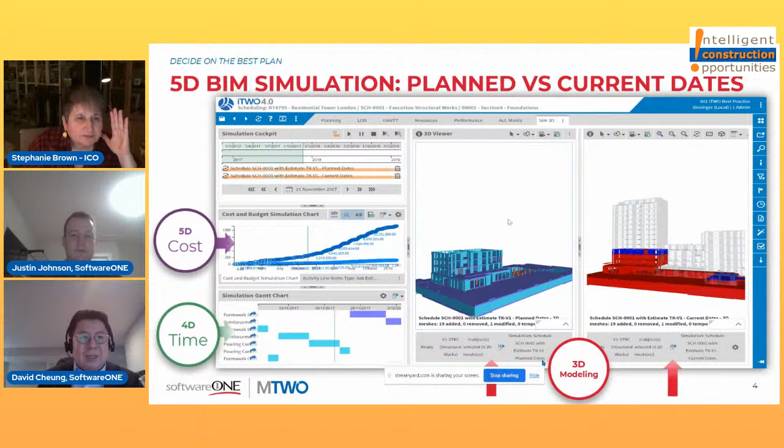Yep. I want to get into that, but I also want to make sure that we're talking about the carbon emissions. So if we could just sort of segue a little bit out of here for a minute. Yes.

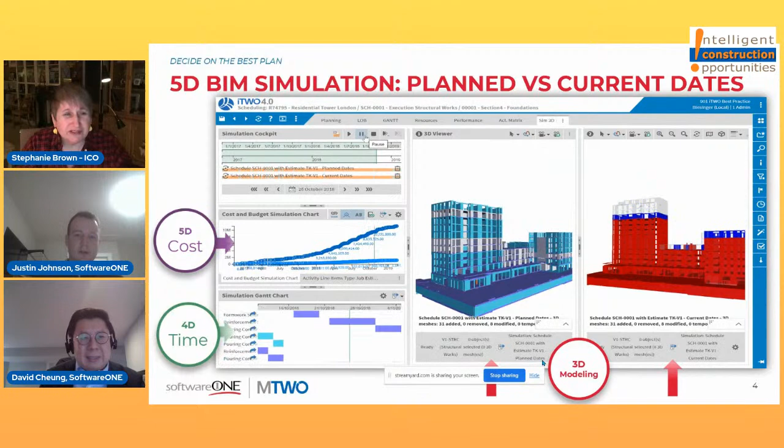Yep. No problem. Yeah. And sort of go into,

why are carbon emissions the problem? We kind of want to understand how much carbon does the construction industry emit right now, and why is this all of a sudden? Well, it's not all of a sudden. Certainly it's been coming along, but in North America we've been slower to adapt to it. Certainly, Europeans have been ahead of this. But we want to get into how carbon affects us based on how the construction industry is somewhat responsible for those emissions.

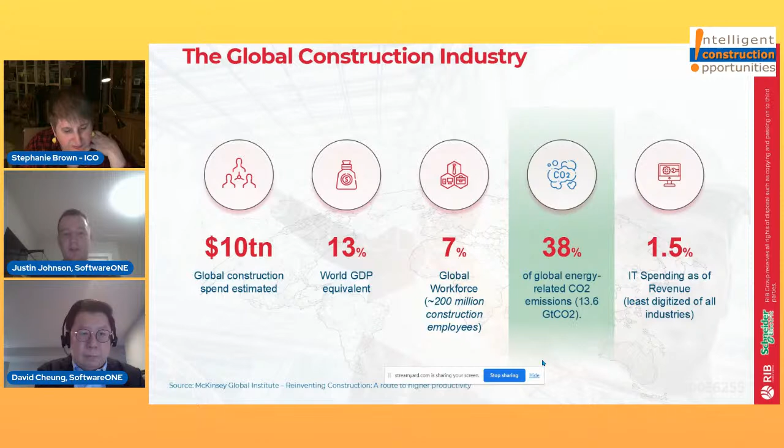Yeah, so I think this slide does a good job of summarizing some of those key figures, Stephanie. The one I've highlighted in green here is that 38%, so over a third of all the carbon that's emitted in the world comes from the construction industry. That's if you think about the whole life cycle of construction: the materials that go into whatever you're building, the operations of delivering those materials to site, what happens afterwards, demolition. It's a full life cycle analysis, and it's over a third of the global CO2 emissions. So it is a very large aspect of the overall emissions of what we're doing on this planet together.

If you further break down that 38% of building and construction sector carbon, you want to see where that actually comes from. In blue at the top of the screen there's transportation, which is 23%. There's industry, 32%. And on the right-hand side, the red and the gray are what comes from the building construction sector. In red is about 28%, the building use phase. That's after we've constructed something, we want to heat the building, we want to cool the building; those emissions from the actual building after it's constructed are 28%.

But there's this hidden 10% of the carbon emissions in that gray color, and that's from the building construction and materials. That's something that's kind of been forgotten about, where everyone thinks about emissions in terms of burning coal to heat a building, but people often don't think about the materials themselves. If you're putting concrete in a building, or putting a mass timber building together, those are two very different building materials with very different carbon outputs required to produce them. So that 10% in gray is what we refer to as the embodied carbon.

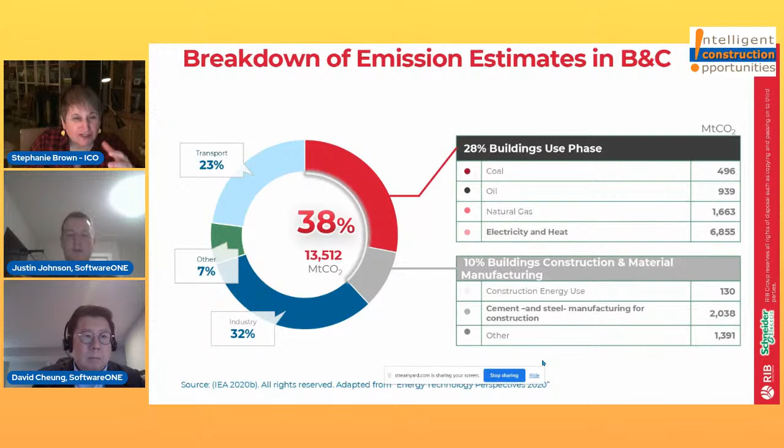Also, I understand that the U.S. government provides tax incentives to companies taking sustainability initiatives. How much, would you say, does the circular economy—what parts of the circular economy would you say what you do fits into? Is it decreasing resource extraction? Is it recycling and remanufacture? Like, what exactly happens on the job site as a result of identifying this data and allowing people—managers of that site—to be able to control it?

Yeah, so I think it's a number of things. I just came to this slide here, Stephanie. You have to think about emissions from an entire life cycle perspective. By having everybody work together in a collaborative platform, there's the obvious benefit of being able to select the right materials and see directly what the impact is of selecting different materials. You don't have to guess and just think 'okay, this sounds good, let's do that'—you can actually get real data to see what the impact is.

Secondly, because everyone's collaborating on this platform together, we're actually reducing a lot of the rework and a lot of the waste on site, because everyone's better able to understand what the sequencing is of the job, what exactly their scope of work is, and how they tie into the other people working on the job. So not only can we help people make better decisions on the design end in terms of materials and sequencing and what to design, but also during construction we can have better collaboration, so we can reduce a lot of the rework that's required and a lot of the wasted material on site as well.

Do you take lean practices into account at all when you're considering how this repurposing and waste is handled within your system? Or if somebody practices lean, for example, would that sit outside of it? Because what I'm thinking is, you can reduce that amount of rework, but then it needs all the more management. You've bought in perhaps different materials that certain trades are not as accustomed to using. Is there a heavy lift here in terms of retraining or managing to make sure the carbon goals are met?

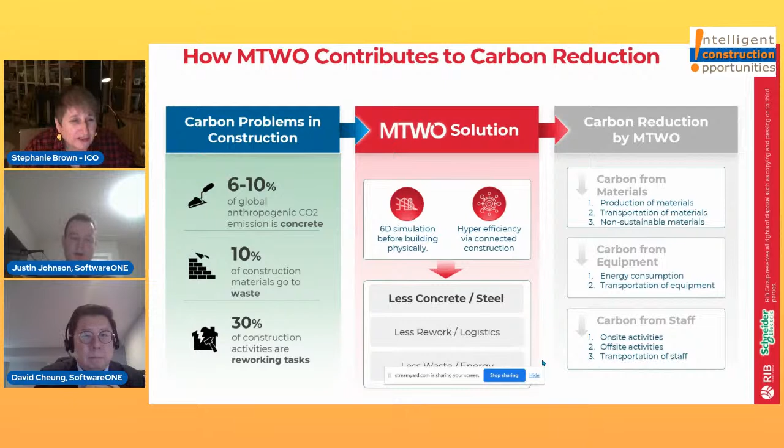Are there environmental databases that you have access to and offer as part of your package that would ramp up their knowledge of what they're doing? Because I'm assuming you must have clients who are new to all of this. Mm-hmm. So how do you start to feed the emissions data to even evaluate how they might change the building materials, for example, that they may use on some average projects?

Yeah, so we actually make use of a database called EC3. It's a free online database that anyone can access. But what we do differently than just going onto a website and pulling data is we connect all this data together with the rest of our platform. So if you do a quantity takeoff to produce quantities that you're eventually going to put into your estimate, we have the system set up so it'll automatically give you an output of the carbon output of that quantity as well. So we're making use of a free online database, again called EC3, but what we're doing that's unique is integrating that directly into the solution that has the schedule, estimate, and model or drawings in it as well, to create a real connected ecosystem of how everything ties together and how you can see different scenarios, track things throughout the project to see how much material we actually used versus what we thought we were going to use, and everything's connected. You don't have to keep going back to a database and manually doing things. It's a truly connected way of managing a project.

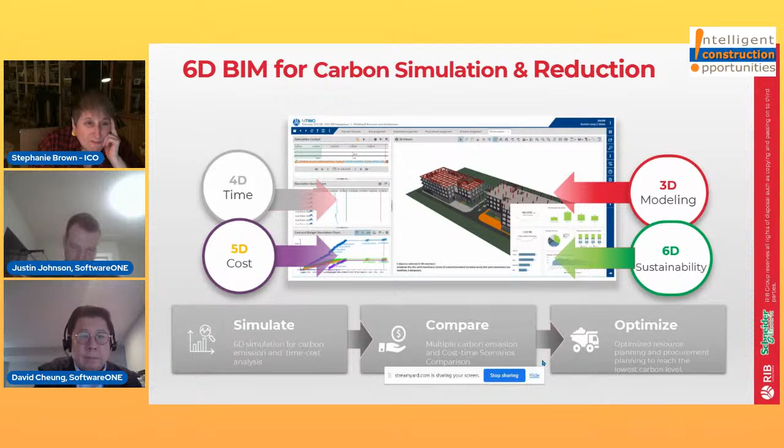Yeah, so what they can do is connect the EC3 database to their design. We're agnostic in terms of what design files can be imported into our platform - so whether it's 2D or 3D, whether it's AutoCAD and Revit, which we find are most common, or whether it's Tekla or Bentley, PDF, other types of design files, regardless of what the engineers and architects are comfortable using, they can use our system to import those design files into the platform.

And then once they're in there, we can set up the connections to EC3 so that they are able to have different dashboards and reports to visualize how their designs are going to perform in terms of the embodied carbon, and then make decisions to change materials or change the size or shape or orientation of the building as well.

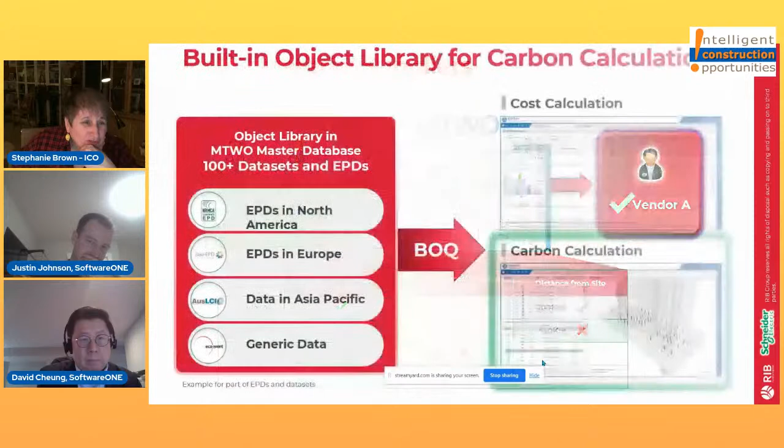Very good. Now let's go back to the site and talk about the trades, because I find in software, oftentimes they are responsible for doing the minutia and picking up the details that go into apps that they're told to download. And this gets back to David's whole thing he talked about at the top about the digital adoption. Yep. A lot of that comes from the fact that they've got actual physical work to do. They've got to get the drywall done. They've got to get those electrical panels in, on and on, whatever their role is in that construction site.

What are the direct health benefits to those site workers by lowering the emissions? Do you find that there are construction workers that get more ill, and is it traced back to the emissions, or is there any kind of reports and documentation about that? Are you aware of that, or is that not something? Yeah, David, do you want to take that question?

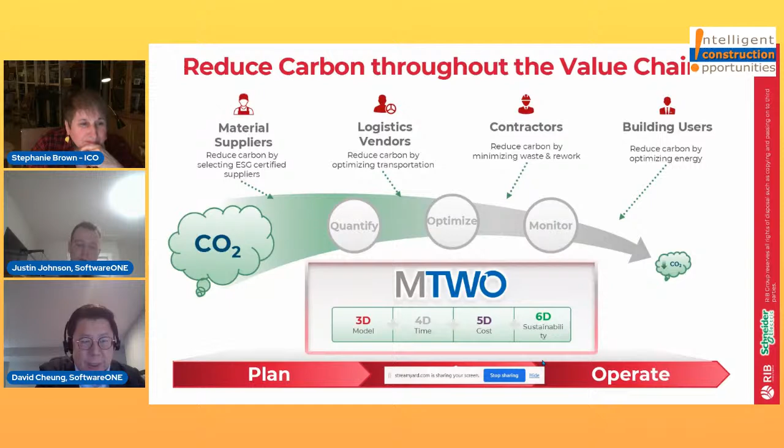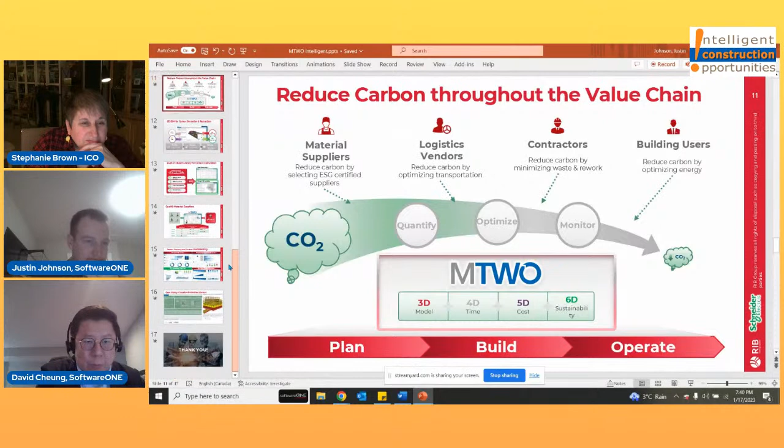Yes, in some cases we have some challenges, especially regarding the site people, to access. So we are trying to make it very simple, make their work less, because adoption will be the challenge. So we have all kinds of preset form templates so that they can use our apps to input the relevant information quickly and easily, without any difficulties, so that they can be more efficient and effective in handling the procedures at the site. So this is one of the key challenges that we need to overcome when we are trying to apply the technology on the site.

So you've got this case study up. This is a dashboard, is that fair to say? Yep, exactly. If they have it on their phone, are they directly or indirectly responsible for capturing your typical or average kind of data emissions for the size of enterprise clients that you do have? So the question is, the people on site, how are they capturing this data? Yeah, responsible for collecting any of this emissions data that the system would then consume to advise both the general contractor and the building owner?

Yeah, so a lot of this data that I'm showing here is from the design side, from evaluating the model and seeing how the model performs in terms of carbon emissions. So it's been color coded: red for high emissions, yellow for medium, and green for low emitting materials. But where the people on site come into this is they're going to be the ones who are actually verifying what quantities are actually being used on site.

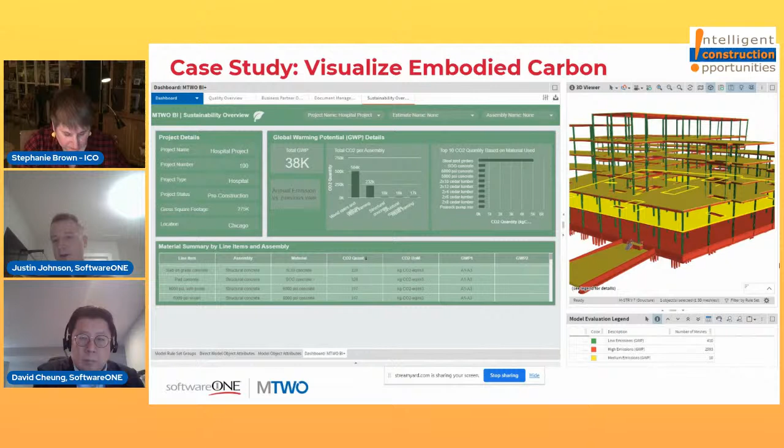For example, with concrete, perhaps this is shown as an 8-inch slab, but maybe they overpoured it, maybe there's a mistake on site, or maybe there's a design change that needs to be captured as an RFI or something like that. Design is kind of the plan at the beginning of the project, but of course the people who are actually on site are going to be the ones who know what's actually happening and report data that's realistic to the real world.

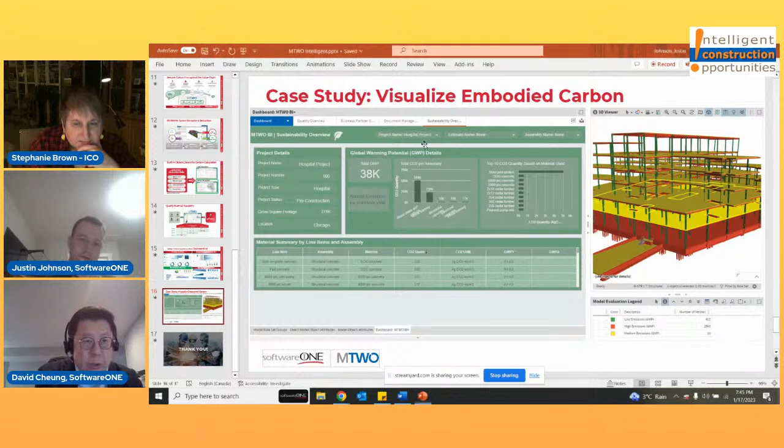And yeah, go ahead, David. Yeah, I have experienced a project using a product called HoloLens. So it's like a VR lens. So when the people go onto the site, they can see the systems, like we always joke, like Iron Man's Jarvis, right? We can point to the systems and then point to the models and do the site inspections, all that stuff.

But all this information is connected to the backend systems. So if something happened on the models, or for example, the inspections, they can just point it out, circle it out, capture an image, and then link that information to our backend system on MTWO through the lens. Yeah, it's one example where we helped our client in one of the projects. You do have a client doing that.

So speaking of different systems, what would you say are maybe the top 5 or even perhaps the top 10 integrations that MTWO tends to integrate with? I mean, with this environmental data, obviously there's a lot of open APIs, yeah? Yes, yeah, we do have an open API.

In terms of integrations, a very common one is on the scheduling side with either Microsoft Project or Primavera P6. We do have our own scheduling module that comes with the platform, but we find that when it comes to scheduling, MS Project and P6 are very popular. So we allow people to continue to use those tools they're already comfortable with, and then integrate that data into the system so it can all be visualized in here.

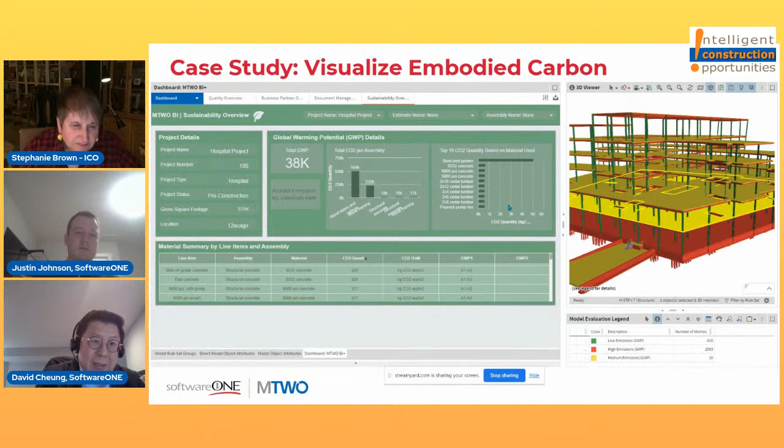But the key value proposition is to provide a single source of truth of data for our clients to make the right decisions when something happens, as I mentioned earlier. So carbon emission is one of the key criteria, right? We are facing that challenge, but a lot more challenges along different stages. So the key value proposition of MTWO is the connected technology. So no more silos.

So I'm curious then. We're going to start winding down, but this is kind of how I want to summarize this tonight. This has been a lot of information, a lot of data. We want to be able to summarize where this all leads to.

So if you've got a client that wants to win more bids, because that's part of the carrot and the stick as far as reducing these emissions, how would you recommend a medium-size contractor, perhaps not as large as some of your enterprise clients, build out an emissions reduction strategy? What modules in SoftwareONE and MTWO would you start with to plug in that environmental data you've referred to? How would you recommend they start to build it out, slowly, as opposed to taking the whole nine yards of the system?

Yeah, and I think that's an important point, that you don't have to take the one process you're doing now, throw it all out the window, and tomorrow you're using MTWO for everything. That's not what we want.